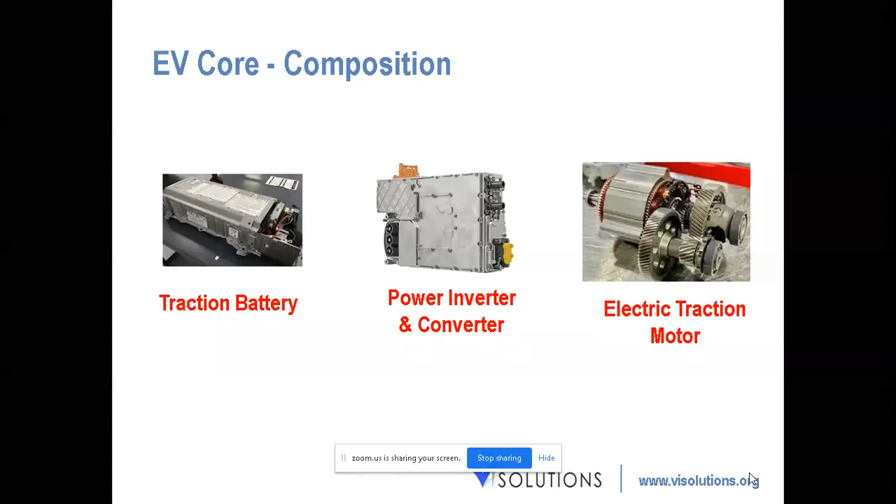Out of which we are going to focus on power inverter and converter, because as a part of this FDP, other people are going to focus on the other components, but I'll show the insights as well, surely. But how does NI's tools provide us with the solution? So that's NI's role in power electronics.

Basically this inverter is going to have a lot of power electronic components. How does it help? The power converter prototyping, how does it help in power converter prototyping, power converter monitoring and control, and electrical drive design and control. So these are the three key components where NI's tools, like LabVIEW and other tools, come in, which you're going to see.

So basically, this is our power converter prototyping. We have a power supply, let's say it could be an SMPS, or mostly in terms of electrical vehicle, it's going to be a battery, a traction battery pack. Then we might have a load at the end, and this load could be an AC motor, or a DC motor, or anything.

We cannot directly connect this battery to the load, so we'll be having power electronic switches, which could be used to convert the power from the battery to something a motor can withstand, whether DC or AC. Depending on that, we'll have a different type of power converter. So if it's a DC load, we'll be using a buck converter, or if it's an AC load, it's going to use an inverter, which converts DC to AC.

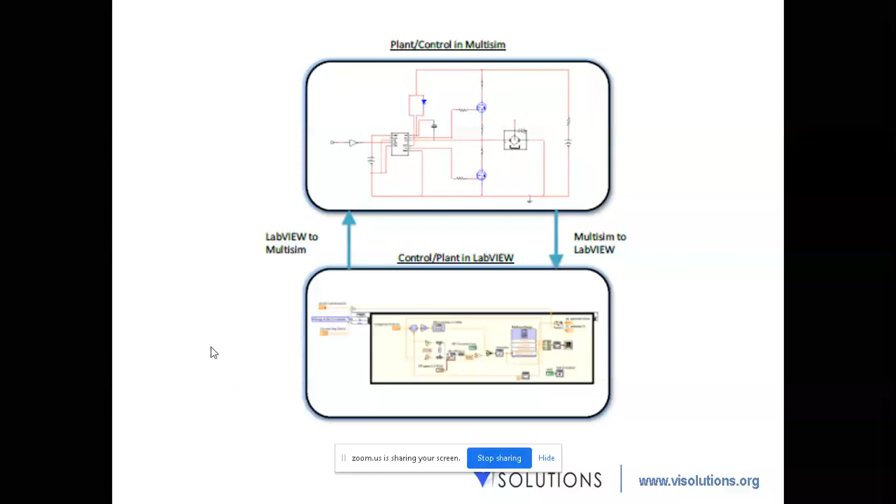So whatever they use during simulation, they will remove the simulation components and replace it with hardware. So the same signal, whatever was sent to software, will be sent to hardware. And as per my experience, not a lot of difference appeared between the simulation and the real world observation. When we used that, we were able to compare the simulated data with the real data, and so far, 99%, it was the same.

So this power converter prototyping will be done by using Multisim circuit design component. Then to control the aspects of it, we'll make use of LabVIEW.

Then in the future, when you're comfortable with it, instead of a Multisim model, you will use a controller, a real-time controller which is connected to the circuit, which has a digital pulses generator, an analog data acquisition device, and this will be connected to that hardware.

In real time it will send control signals to the power electronic switches, and it will also get back the current output as well, so that you can build a reliable closed loop controller.

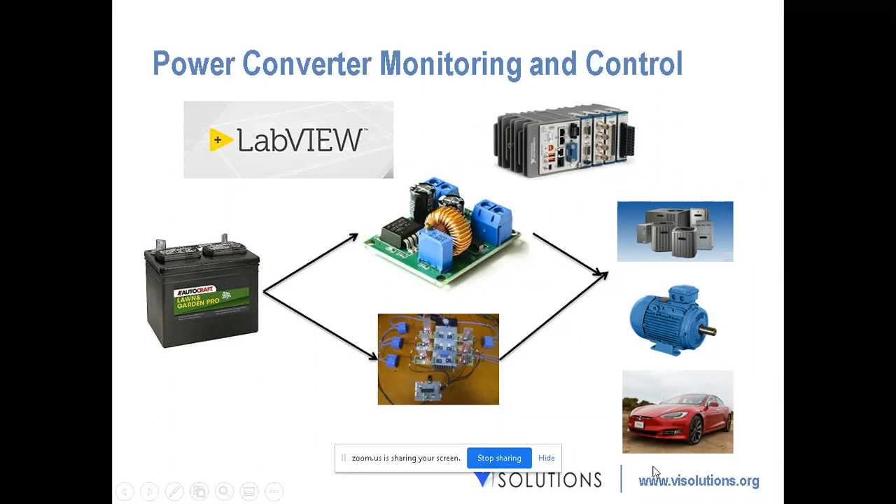That also will be programmed by using LabVIEW, and the load can vary. It could be used to charge the battery, it could be used to power an AC, an air conditioner, refrigerator, or motor, or possibly an electrical vehicle as well.

Out of which we are going to see several examples of how Multisim and LabVIEW work in tandem to achieve whatever you want to achieve.

So in order to give an example, I hope everyone knows, I'm sure everyone knows about what is a boost converter. So it's a circuit which is going to convert a low voltage high current supply to possibly a high voltage low current power supply. It boosts the voltage.

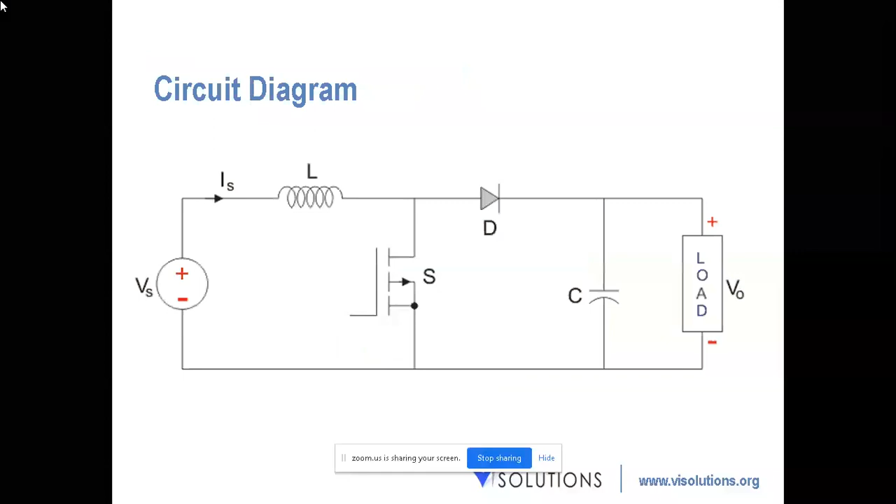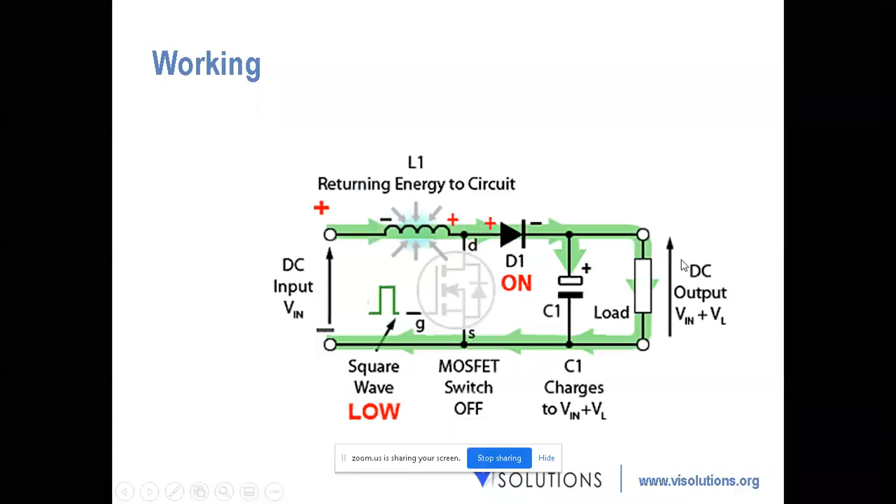It's working and all, I'm sure everyone knows that when the MOSFET is on, the inductor charges as much as possible. The amount of time taken for it to charge and discharge will contribute to the duty cycle. And when the MOSFET is switched off, this will discharge and it will have output voltage equal to the input voltage plus the charge, the power stored inside the magnetic coil. It again gets added back into it. So V in plus V L is going to be equal to V out.

But in order to understand this design, there'll be a lot of calculations involved. We're not going to go in depth into full calculations and all, because that is very rudimentary. We are going to see how LabVIEW is going to help, I mean, we are going to see how NI tools are going to help you with design and validation.

When we design a boost converter, we consider several aspects and specifications. First is the input voltage - how much input voltage can your power supply guarantee? It could be from a solar panel, a battery pack, or from the grid directly. And what output voltage do you want? Probably you have a 12-volt battery and you want to control a 48-volt motor. These things should be considered carefully, along with the maximum current drawn by the motor.

Then voltage ripple. Let's say you have an output voltage of 48 volts, but you have a MOSFET switching on and off so the inductor acts like a transformer, switching at very high frequencies. So in order to filter out those ripples, we need an appropriate capacitor. You cannot filter it out fully - that would require infinite capacitance, which is not possible. So there will always be a threshold requirement.

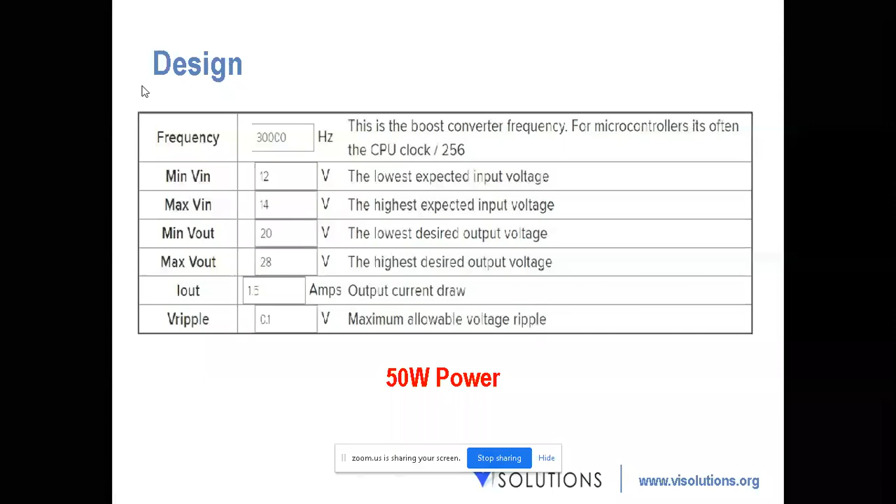So when I calculate it, I get values like inductor size as 38.88, minimum value. This is minimum, which means I can go significantly larger as well. I can give peak inductor current. Inductor current is going to decide the thickness of the inductor, so I cannot keep any thickness, because it's going to pass more current inside it.

And capacitor value. We are going to use a Schottky diode because Schottky diode has ultra high frequency capability to switch on and switch off. So it is going to have values like voltage and current.

So based on these values of voltage and current and other calculated values, we are able to fix a boost converter of something like this, which we are going to design right now in Multisim.

So, 38.88 microhenry, I'm just going to give 40 microhenry, and 500 microfarad. I'm going to give the next nearest value; it should not be max minimum, the next maximum value will be given, the next maximum standard value, that is 680 microfarad.

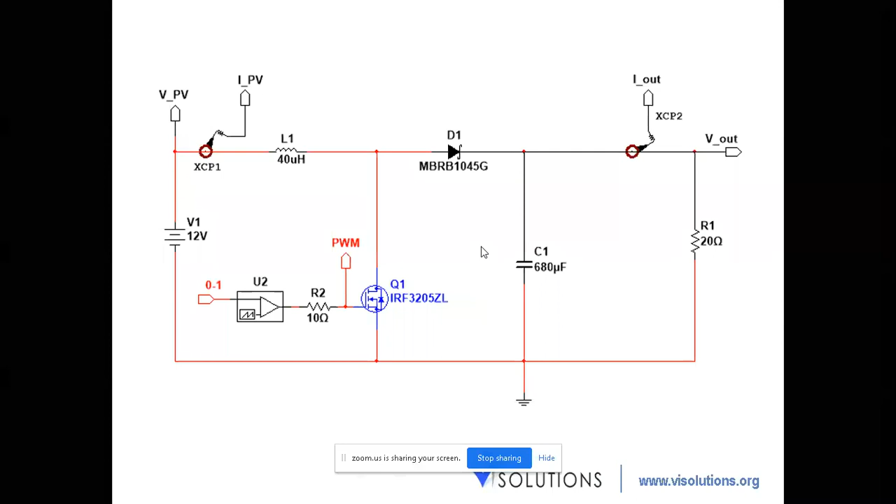Now, in order to design the schematic and evaluate its working, I'm going to make use of Multisim. Let's see how Multisim is going to look like. Basically Multisim, this is Multisim, we're just going to go for the implementation part.

This is the circuit which needs to be simulated, so we have the circuit schematic here. This is Multisim, the circuit design platform where we can pick and place different components, interconnect them as per our requirement. It also has a SPICE model for every component, meaning you can simulate it with respect to time, but we have to know the basic rudimentary operations.

That is first placing the components. Multisim is very rich in component placement, meaning it's going to have most of the components that are required for us. If you want more components, probably a different package of Multisim will be available, but we are not going to go deep into that. So in order to place components, right clicking on it and selecting place components is going to do the deal.

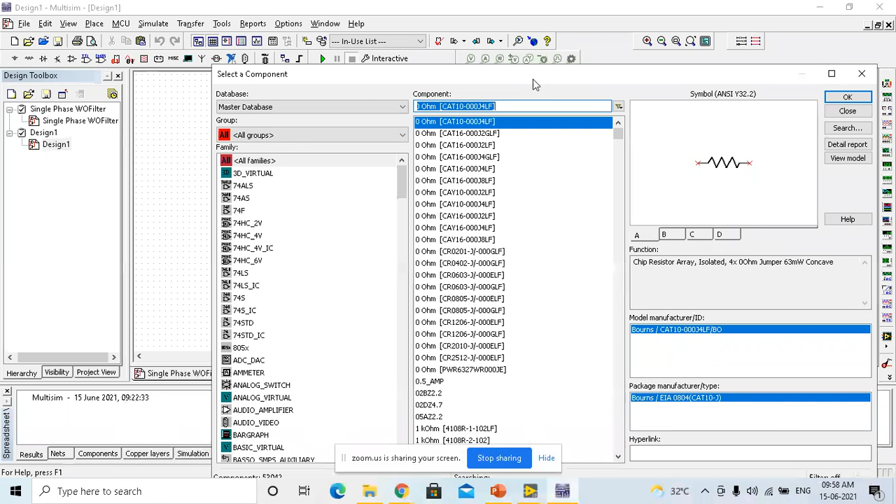And if you see, this Multisim has like 53,000 components, 54,000 actually to be frank. And if you want to filter out depending on the type of component which you use, let's say 3 types of components are going to be there if you take any circuit. It's going to have a power supply, it's going to have active or passive components, and at the last you'll be having measuring components. The measuring components are used to extract information from the circuit.

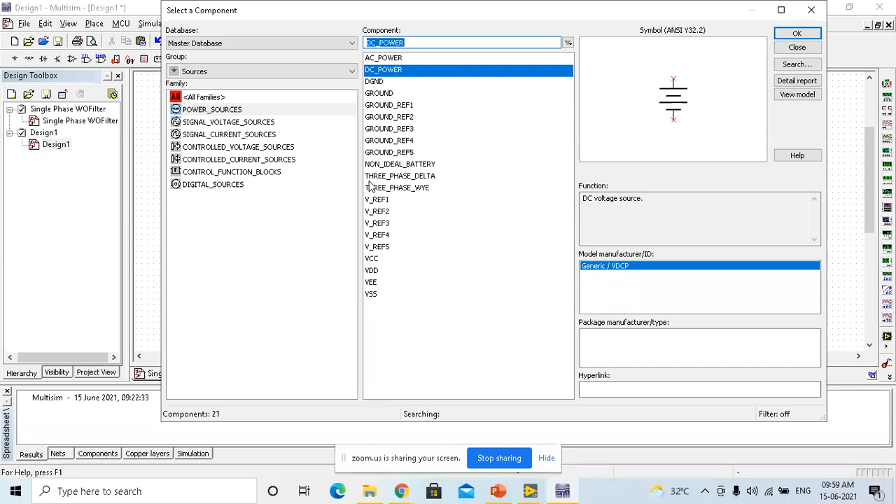So first is going to be the sources. And in sources we have power sources, and in power sources we have DC power, which we pick and place here. By default, it is going to have 12 volts. If you want to change it, you can change it, but let's place all the components first.

So next is going to be this 40 microhenry inductor, which we are also going to find here by going to group. I'm going to try to filter it out, find the basic component, and in basic components I have different types, out of which I'm going to find the inductor. An inductor can have any value; different types of standard values will be given here. But let's say I don't find my value, I just type it as 40U, and it's going to give me the recommendation.

And I can also select the type of component type. This does not have any significance in simulation, it's just to have it as a reference. So, 40 microhenry, I can pick and place.

Let's say we don't know what type of component only it is. I can always go to all groups, and if I don't know the component name, I can simply type it here. Let's say I don't know where to find this Schottky diode. Schottky diode normally comes under diodes.

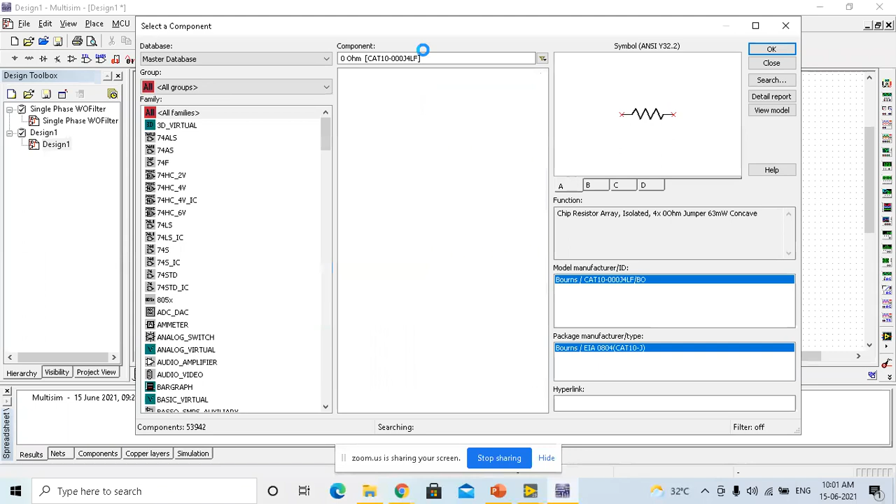Even if you don't know, you can always go to all groups and type the code. In this case, the code is MBRB1045G. There are different types of Schottky diodes. This one is a 10 ampere, 45 volt Schottky rectifier.

And Multisim also, obviously, since it's dealing with power electronics, we have transistors available. We have to select an IRF3205, which is nothing but a power MOSFET with 110 ampere pulsed current withstanding capability and 50 volts constant voltage. You can view the model here.

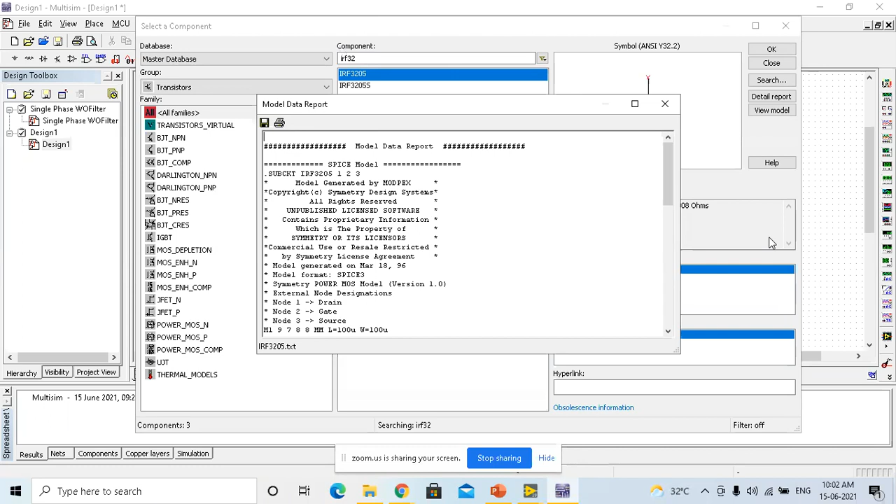Basically every circuit, in order for it to be simulated in the computer, is going to have something called a SPICE model - an equation that defines the characteristics for circuit simulation. So we're just going to select this IRF3205, and I'm going to place it here.

Next one is going to be capacitor. Capacitor, you cannot just type here as 10 microfarad or nothing, it's not going to work. If you go to all groups and type 10 microfarad, it won't know for which you are trying to say. So for generic components like a resistor, capacitor, inductor, you have to go to the basic components and find the capacitor or whatever it is, which will be available in basic, and here you have to type the value.

Here is going to be 680 micro. So at last you're going to have a load. Right now, to test the circuit, we're just going to have a resistive load. I'm going to find resistor here. I'm just going to take an arbitrary 20 ohm resistor and have it here.

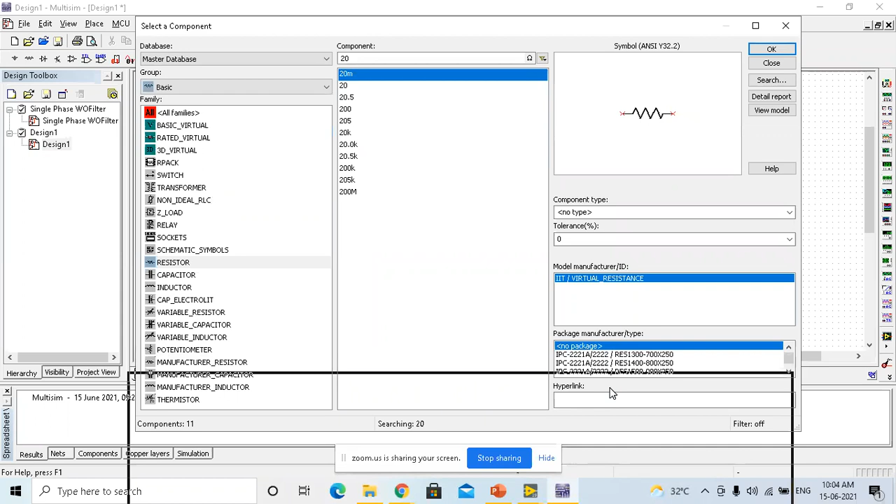At last, the circuit components required is completed. But anytime we try to do a simulation, since it's a calculation which is taking place at the back, any calculation requires something called a reference. So we need to go to sources at last, and in sources, power sources, we need to have a ground. It doesn't matter what type of ground you're going to use, but it's best if you use a normal ground, and this normal ground is going to act as a reference to your circuit.

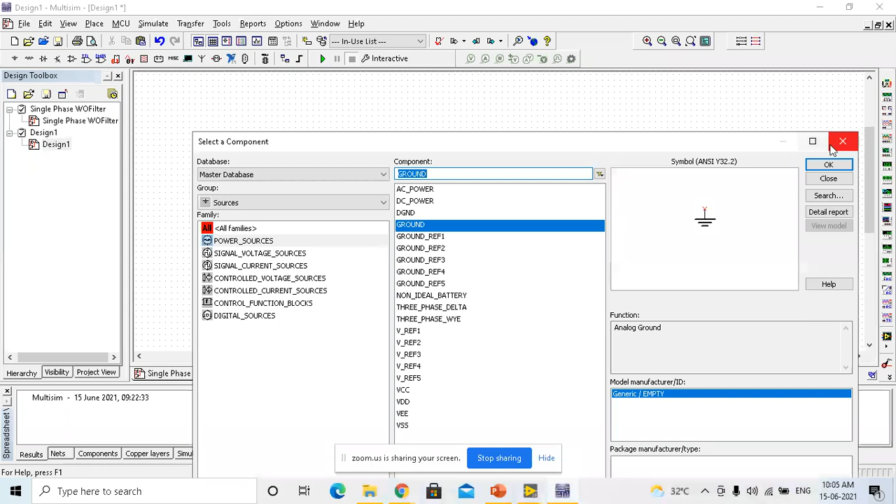So now we can interconnect these components just by clicking on the between the two terminals.

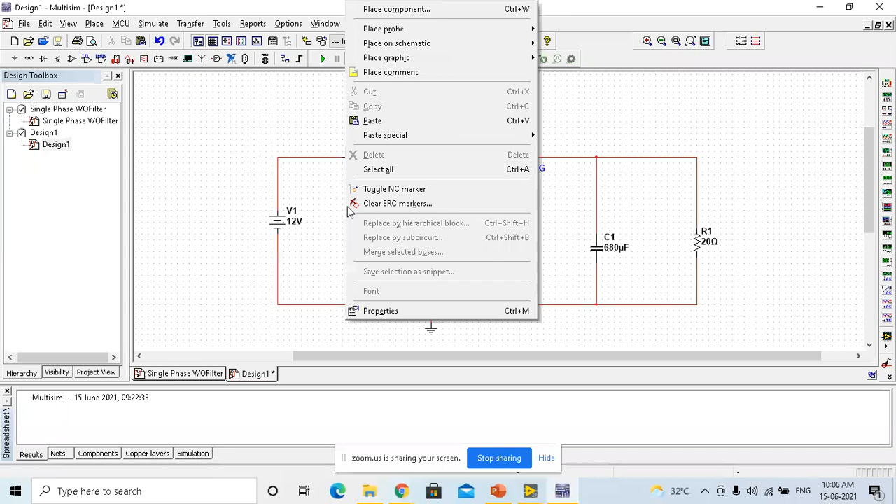Now, how do you generate the sine wave? I mean, the duty cycle. Duty cycle generator is not really hard, we have a separate component for it which can be used.

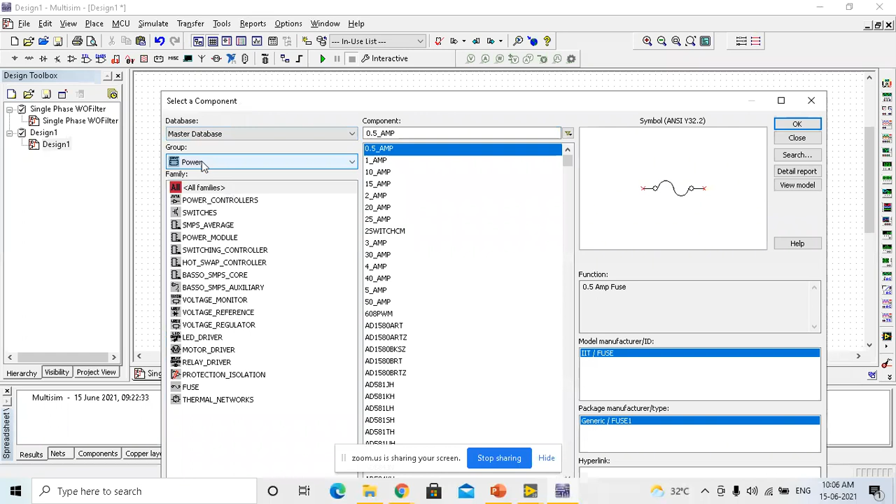So you can find that component, and I believe in power, we have something called power controllers. These power controllers have power converters required for different types of power electronic switches. It could be for AC to DC converter as well as DC to AC converter as well.

Let's say you're trying to make an AC to DC rectifier, so you have the phase angle controller as well, SCR, triac conversion - those things are also here. And if you want to do an inverter for three phase, you have three phase generator as well, SPWM generator is also available. So right now I'm just going to go for PWM, and I'm going to place it here.

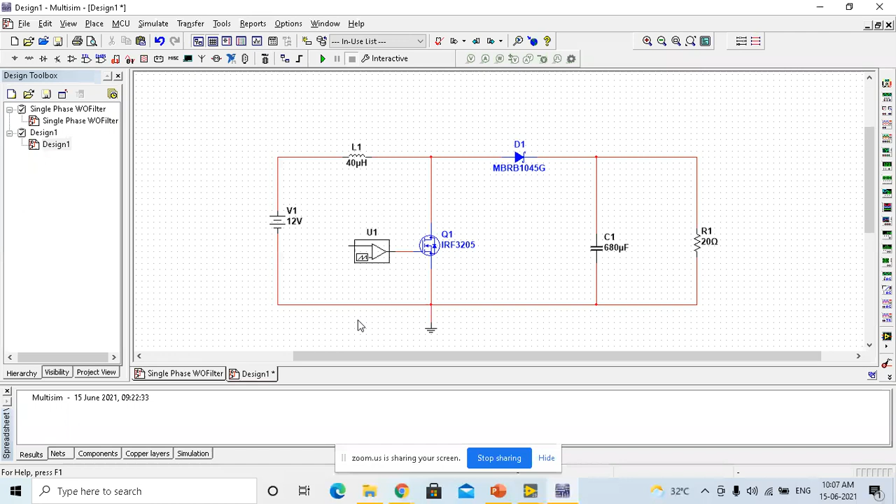I hope that was clear as of now.

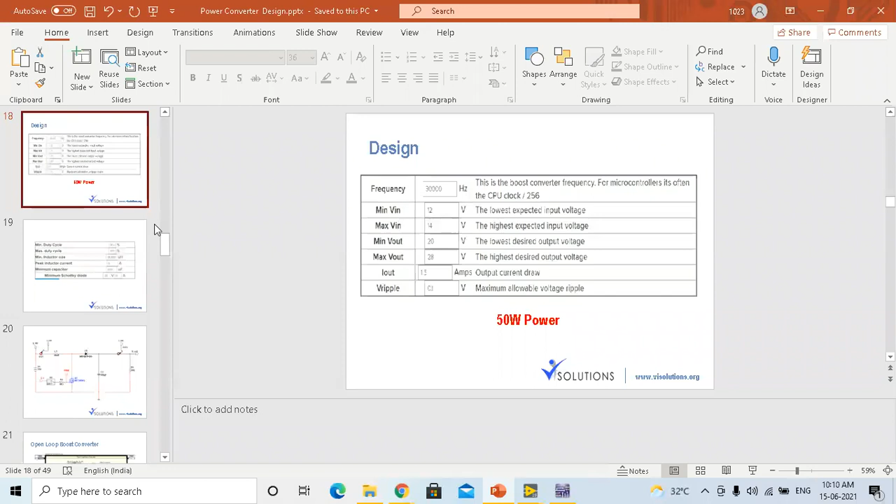As per our calculation, as you can see, all these components have been designed keeping in mind 30,000 hertz frequency, kilohertz frequency. So here also we'll give the 30 kilohertz frequency.

In order to fix the duty cycle, we need to have a reference signal generator, to give 0 to 100%. We need to give a value here, which will be considered as 0 to 100%.

Meaning, if I give 0 volts, it should generate 0% duty cycle. If I give 1 volt, it should give 100% duty cycle. Anything in between given, correspondingly, it will give the duty cycle. Let's say if I give 0.68 volts, that should be taken as 68% duty cycle. So it's scaling between 0 to 1 voltage to duty cycle.

The output amplitude of this PWM is basically going to be the turn-on voltage for the MOSFET. Most probably the MOSFET will have input characteristics and transfer characteristics. Basically, most power MOSFETs will switch on above 10 volts, plus or minus 10 volts for switch-on voltage. So I'll just give slightly more than that.

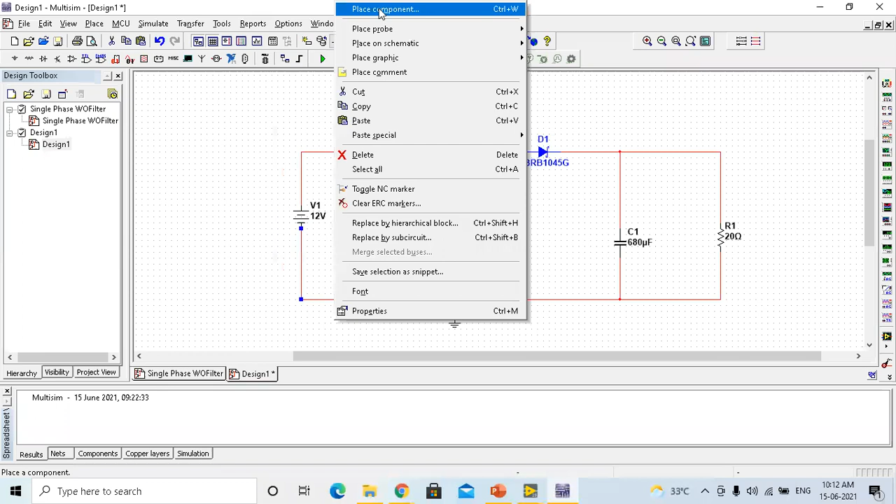So as we spoke, giving 0 to 1 volts here will vary the duty cycle from 0 to 100%. So I just need to have a variable voltage supply, change the values, then I'll be able to observe. To do that, I can right click, go to place component.

I'll go to all sources, signal voltage sources, and it's going to be like a DC interactive voltage source. Signal voltage, so DC interactive voltage source is going to be there. I'm going to click OK.

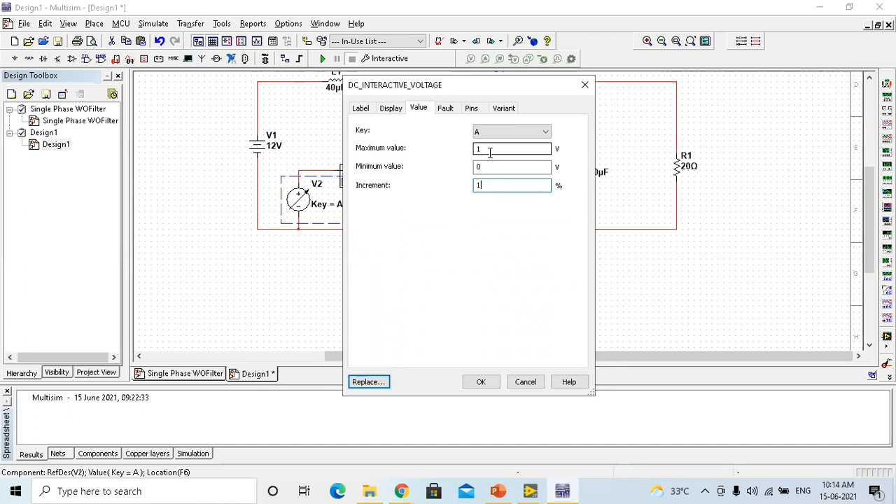If I double click on the V2, interactive voltage source, I can set what is the maximum value settable and minimum value settable. This is basically to convert the voltage to duty cycle. This can accept only from 0 to 1 volts, and this also should be set only to 0 to 1 volts. To give more steps, I'll have the increment value as 1%, so I can vary every 1%, from 1% to 100% of this 0 to 1 voltage. So every movement will be every 1%.

Now I can run this program, I can run this simulation. It's going to run. But the problem now is we will not be able to see any observation. I'm not saying it's impossible to view the observation in Multisim - LabVIEW is more suited for it, but it is surely possible to see the observation in Multisim as well.

For that, we have certain probes available in Multisim. There's something called a voltage probe, which I can use to observe the voltage. I'm first observing the input. I can also observe the current through this place at the input. So if you see, it's showing as 12 volts, and apparently 581 milliamps is being consumed.

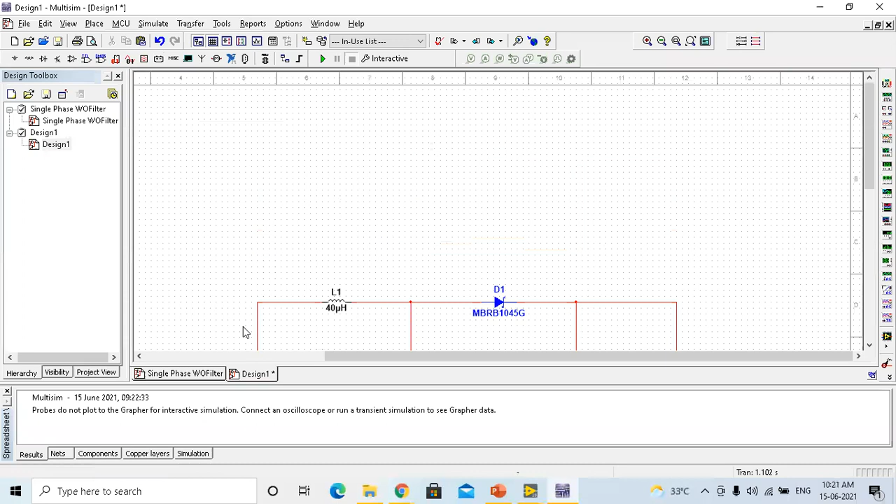LabVIEW co-simulation is there, voltage input terminal. There are two types of communication that can happen: one is from Multisim to LabVIEW you can send data, or from LabVIEW to Multisim you can receive data. So you have to use appropriate terminals. If you want to receive from LabVIEW to Multisim, let's say if I want to get the duty cycle value, that command is got from LabVIEW to Multisim. So we'll use voltage input terminal.

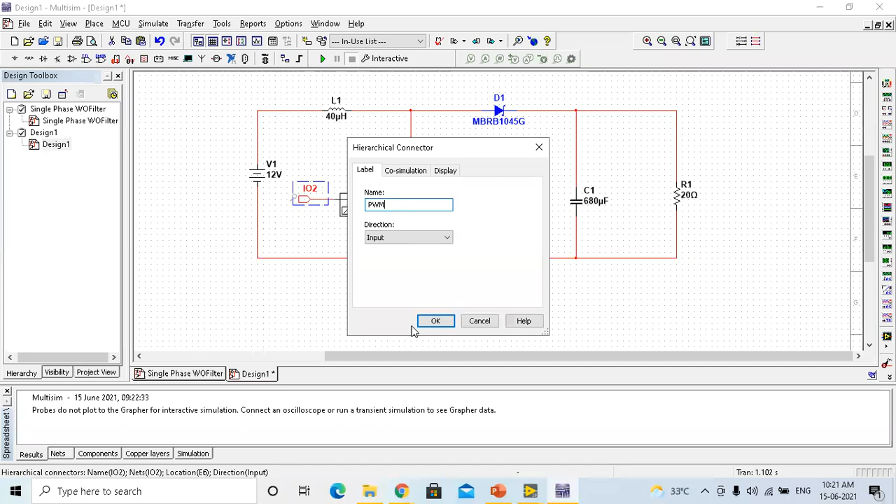We can double click on this terminal and change the name of the terminal as well. Let's say this is PWM, we can set it as PWM. Let's say I want to observe the input voltage and output voltage, so then I'll place something called voltage output terminal.

You can rotate the components by pressing Ctrl and R together. And I can observe the input voltage. I'll double click on it and make it V in. I'll place another component.

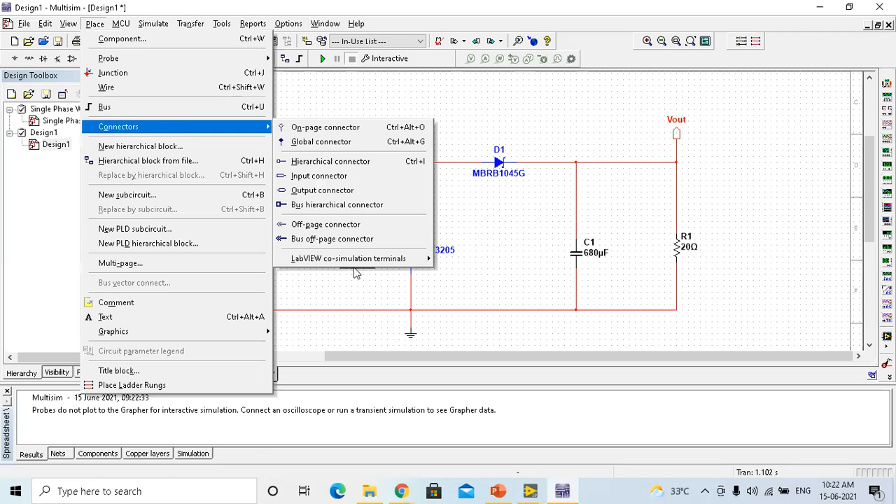Now current is a tricky object, because if you see, we have a current input terminal, of course, but right now we don't have a current output terminal. So typically this can be handled by using something called a current clamp. The current clamp will basically convert the current to a current equivalent of voltage.

Current clamp multimeter is available, no? So the same thing. This current clamp is going to have a ratio of voltage to current out properties. So I just want both the values to be in the same proportion. Right now by default it's going to be for 1 millivolt, it's going to generate 1 volt per 1 milliampere change. I'm going to change it to 1 millivolt per 1 ampere, that is 1 volt to 1 ampere basically if you cut mA and mV.

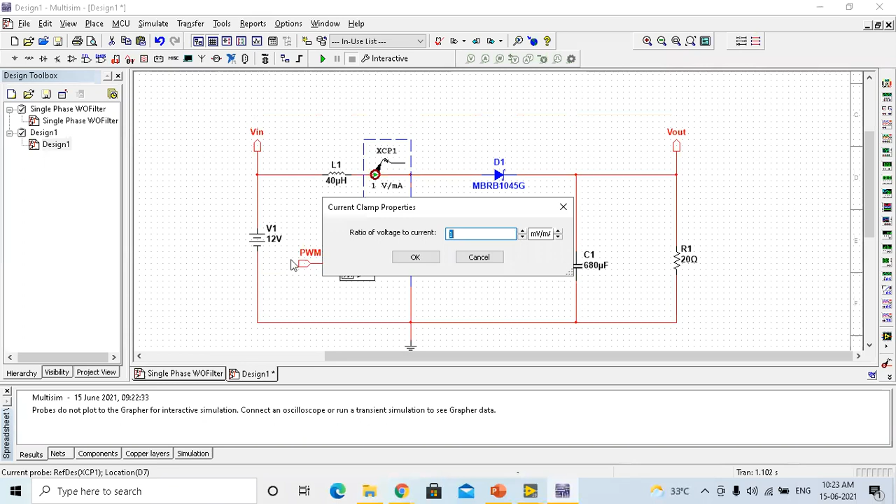So I'll have one more output as well. This is for input current and this is for output current. Now current has been converted to equivalent voltage, so I'll again use the voltage output terminal to transfer this data.

Okay, this is V out, sorry, I out. I mean V I in.

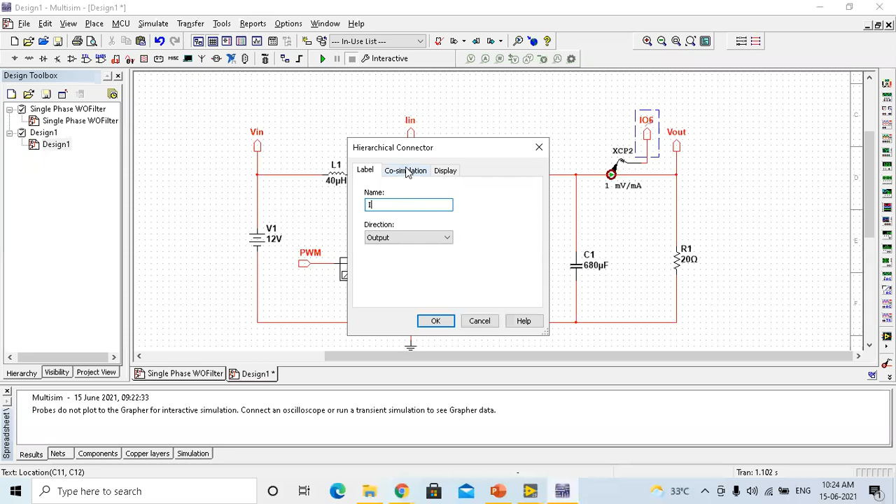Okay, I'll save this as boost, and be done with it.

Okay, now we can close this off and see what exactly this LabVIEW is going to do. Now that our circuit has been designed, next is to create a converter for this circuit.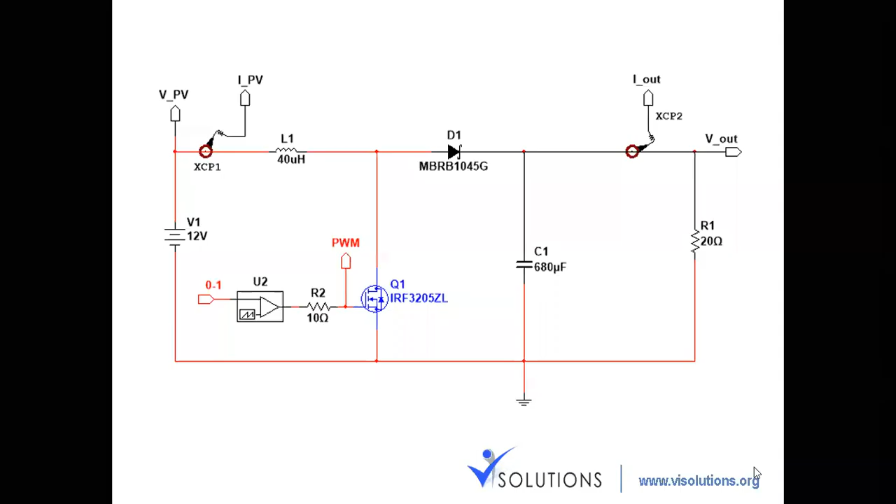So for that we'll go for LabVIEW. How is LabVIEW going to help you? LabVIEW is basically, I mean, a graphical programming platform where you can use zero code. It's a tool which is mostly important for Industry 4.0, where Industry 4.0 acts as the place that introduces the concept called zero code, no programming concepts for automation.

So that's one of the aspects they introduced. LabVIEW is a very important tool for that, and here zero coding is required. One thing is you have to drag and drop different functionalities together and connect them to work with each other.

So here, if you see, this is the code in order to interface LabVIEW and Multisim together. Basically we have this boost converter model brought inside. We send the command of PWM to it, and we receive responses like voltage, current, and other things, which we can plot as well.

So since it comes under simulation, LabVIEW has different types of objects. We'll have two windows basically: one is called the front panel, and the other one is called the block diagram. The front panel is a place where you'll have the GUI, where you can create inputs and outputs.

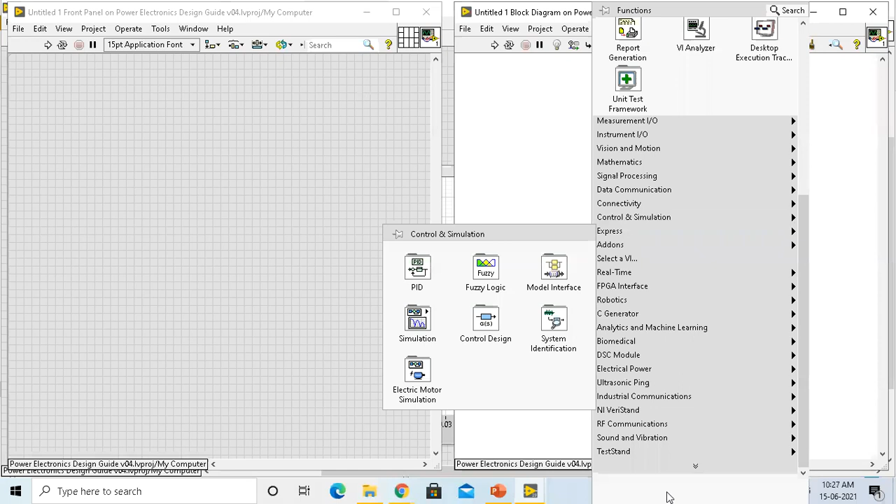LabVIEW also has several toolkits used in different domains. If you want to do signal processing, you have the signal processing toolkit. If you want to create software-based control systems, you have the control system toolkit. If you want to do machine learning, you have machine learning, if you want to do deep learning, you have a separate deep learning toolkit. If you want to create SCADA, you have the supervisory and data logging toolkit, electrical power, industrial communications, RF, and so on.

So now coming back to our design, all we have to do is simulation. For that, we have to go for control and simulation, and we have something called simulation, and a control and simulation loop. So this is how we can simulate.

We can bring the Multisim model inside LabVIEW. The Multisim model is basically, in the front end, just pictures interconnected together, but at the back end it's basically a SPICE model. SPICE model is basically, you can say, it solves ordinary differential equations, which makes it easy for us to simulate, running at the back.

And in order to give us the output, in order to create the responses, these equations will be solved and the responses will be obtained for us. That's what this control and simulation loop does. If you configure it, you'll have an ODE solver where we can give the initial and final time. Basically it's going to do the integration, and we can control other aspects as well.

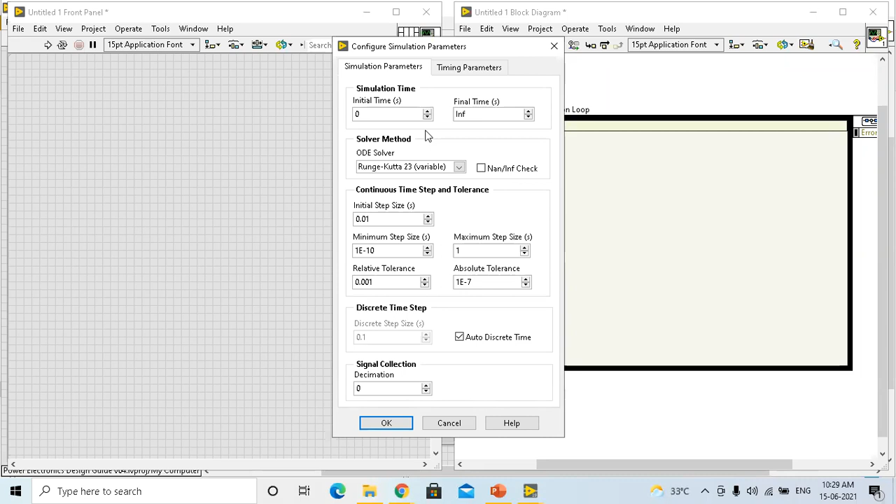The next step is to bring the Multisim model inside, which I can bring from here: Control, Simulation, External Models.

External models are basically available outside. You can build your own model if you know, let's say, the transfer function of a boost converter or a buck converter, and bring it in here to build it internally. But let's say you're going to extract an external model from external software, you have other options as well, like Multisim.

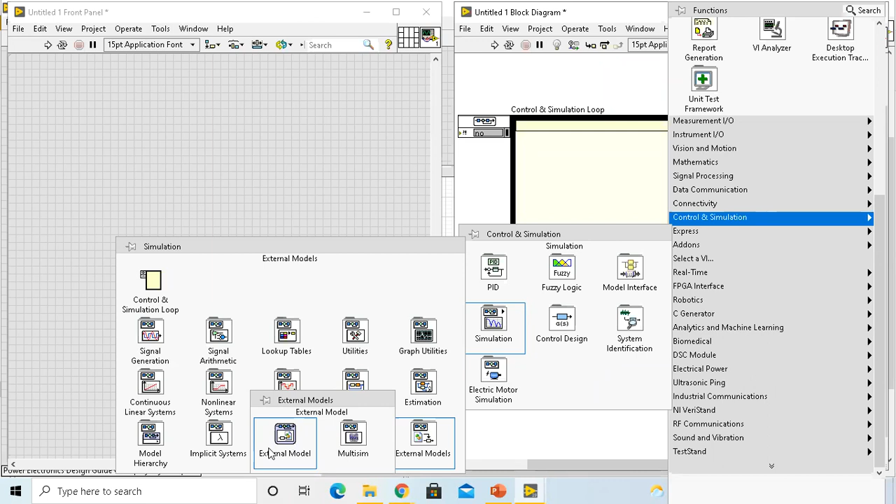Or let's say you have a MATLAB model. Most MATLAB models can be converted into a DLL, so for that you have the external model option as well, and you have a model interface toolkit which can help you get the Simulink model as well. So there are ample opportunities.

So I'm just going to take the Multisim model and place it. After I place my Multisim design, it's going to ask me for the location where the Multisim file is stored. I'll browse, go to desktop, select boost converter, and give OK.

Here, basically, I need to give the PWM input, and I will be able to observe the output required for me.

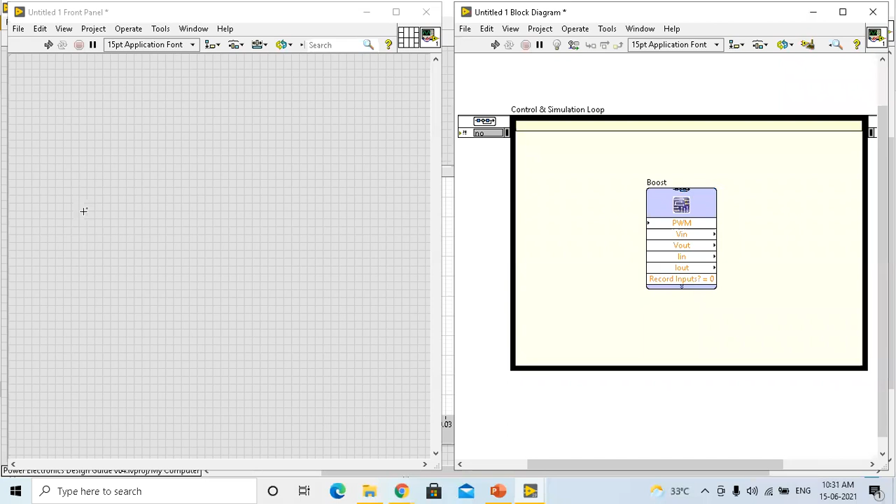Now, LabVIEW is very easy to use for giving inputs, unlike Multisim where we have to give a power supply value directly. In LabVIEW, to give inputs, we just right click on the front panel, and you'll have different types of data types like any programming tool. You'll have numeric, because PWM is a numeric value.

There are many ways to give the PWM input, out of which I'll use a knob. By changing the knob, I'll be able to change the PWM.

PWM will vary from 0 to 1. The minimum value is already 0. For the maximum value, I'll change it to 1 by double clicking on it and editing it.

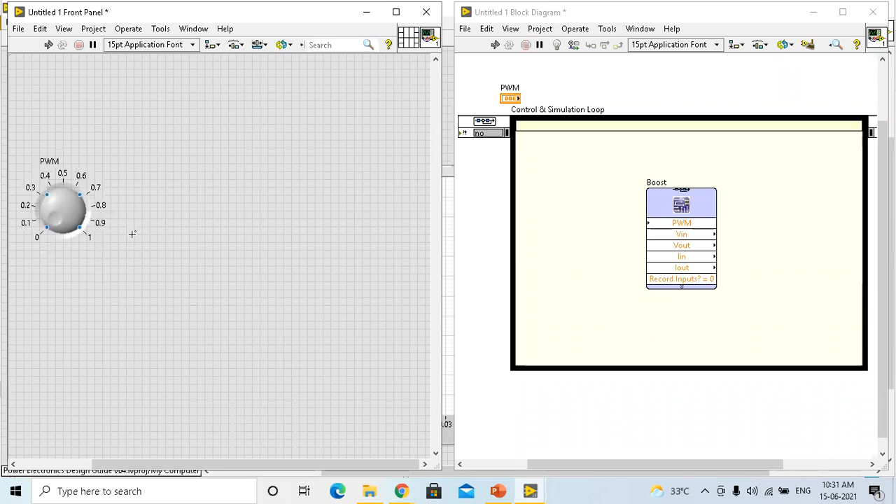So this PWM knob is connected to the PWM input of the boost converter. To view the output, there are many ways to do it, but the most significant way is there is a plotter available.

I'll right click on the LabVIEW window, go to Control, Simulation, Graph Utilities. This is available in the simulation and can help us plot the values of voltage output, input voltage, input current, and everything.

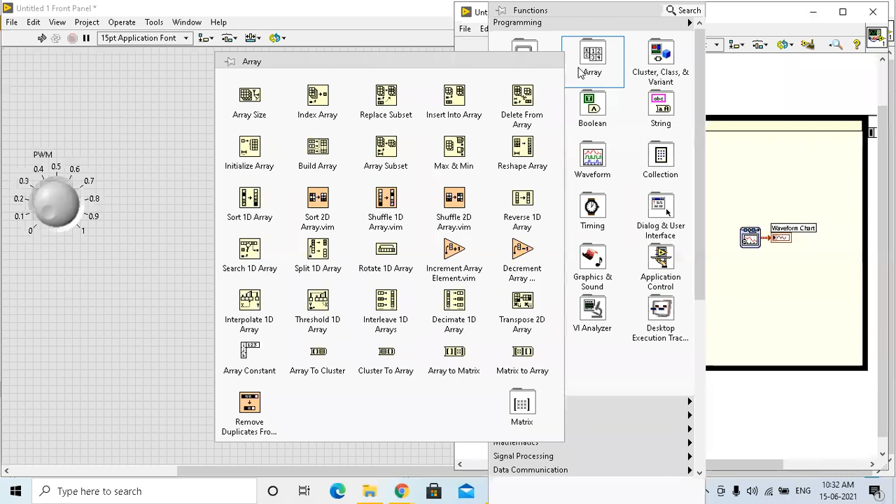Now I want to send multiple values at once, so I'll just convert everything to an array. First I'll send the voltage input, then the current input, next voltage output, current output.

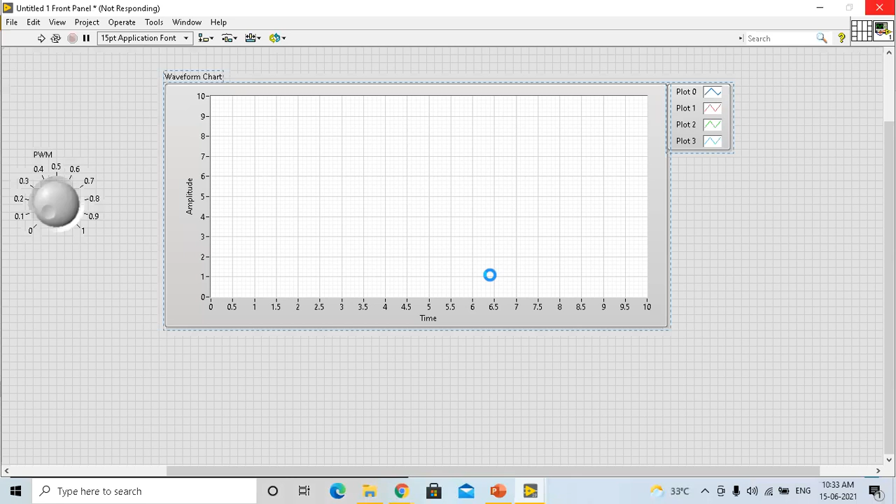Another important reason why people go for LabVIEW is you can configure the appearance of your program in many ways. You can tweak your program and model your GUI as per your wish, and change it however you like.

So I'll just run this program for now. So I just pressed it. Like in Multisim simulation, your LabVIEW program can also be run by clicking this run button.

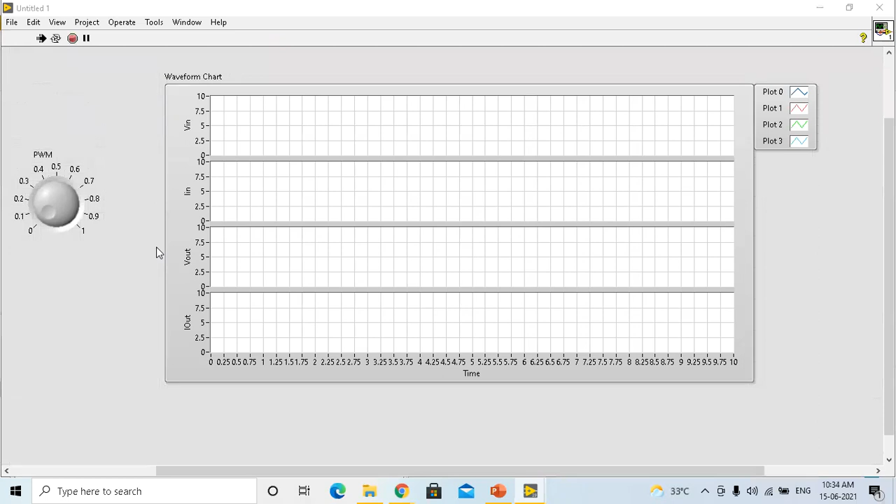When I click this run button, the simulation will take place. LabVIEW will give the data to it, and Multisim will respond to it. Right now we are getting data, but the scale, if you see, is from 0 to 10, and right now it's working very slow, every millisecond or so.

So in order to see this data, we have to auto scale, and this is what the data which we get. To stop the program, we have this abort button.

Apart from this, I will also display the digital display of this so that I can see the mathematical value as well. Here I can see graphically what value I'm getting, but to see the approximate value I always have to use a value box like this, which will show me the numeric value.

Apart from that, I can also control the rate at which this simulation will work - that is this discrete step time. So I can make it work, each step, every 1 millisecond, microsecond or so. At least the time base will be calculated as such.

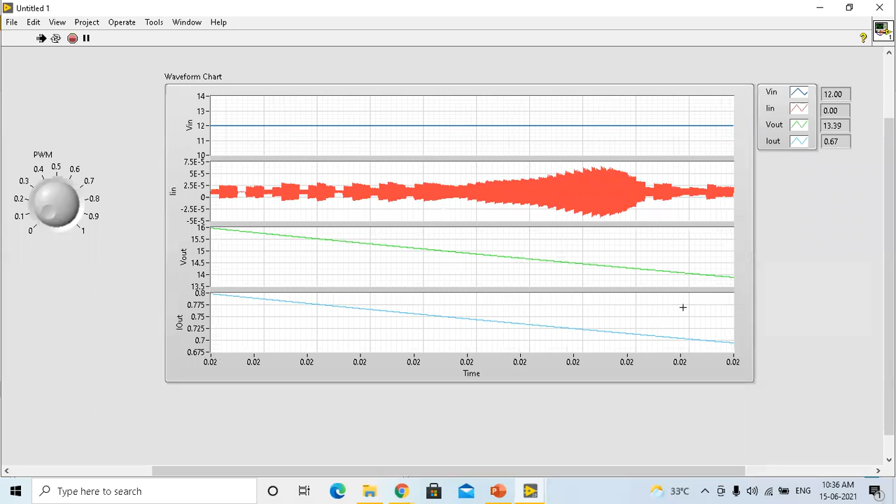Initially you can see this V out is overshooting, because any time at the start of a power supply when you give it, it's always going to have a transient due to the inrush current and stuff. So when it settles down, you will see its value - we haven't even given the PWM value yet. But after it settles down, if you change the PWM, you will be able to see the value change.

It has settled down. Right now your input voltage is 12 volts, output voltage is 11.62 volts. So let's say I vary the value - you can see the V out has changed.

So you can still change the PWM voltage, and by changing the PWM you can get more value out of it. So I get 0.75, which means I get like 4 times the input voltage.

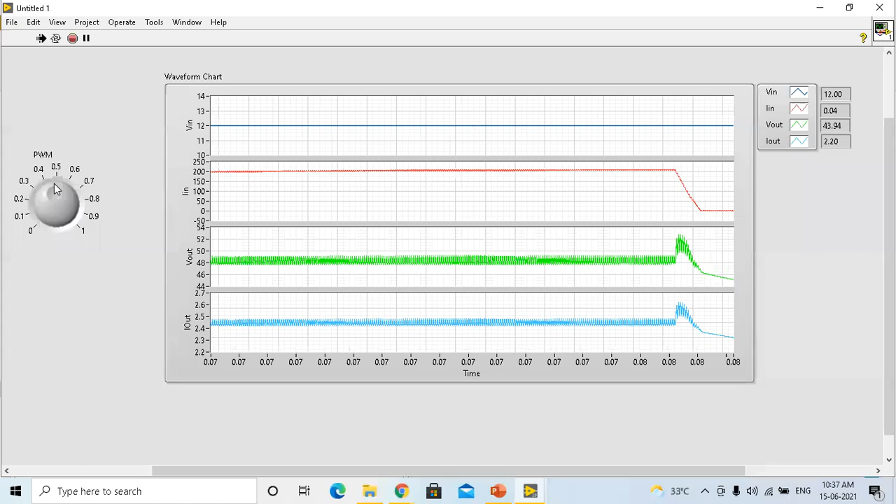Okay, so here we can see the input current, that is, the ripple current, the current ripple due to switch on and switch off.

So this is how you can test and validate your controller. This is open loop control, meaning I just give the PWM and the output is going to be the output voltage.

Similarly, you can basically create closed loop control. In case of closed loop control, you have to convert. Either you can have the set point as voltage, or in case of electrical vehicle, you can set the set point as speed, for which we'll see the examples as well.

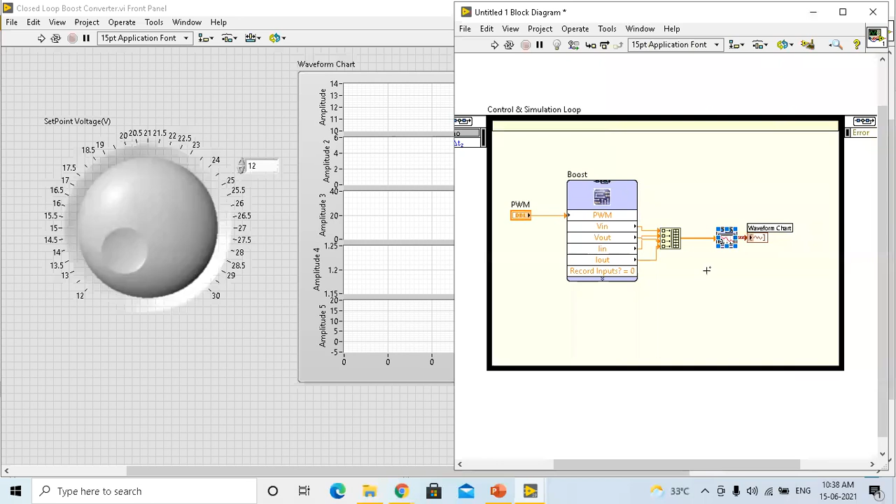Previously for open loop, our input was just PWM and output was V in, I in, V out, I out. For closed loop control, basically you'll get the set point voltage, and your output will automatically go and set at that voltage. Instead of giving the duty cycle, we will give the set point, and the duty cycle for that set point will be automatically calculated, and that voltage will be set.

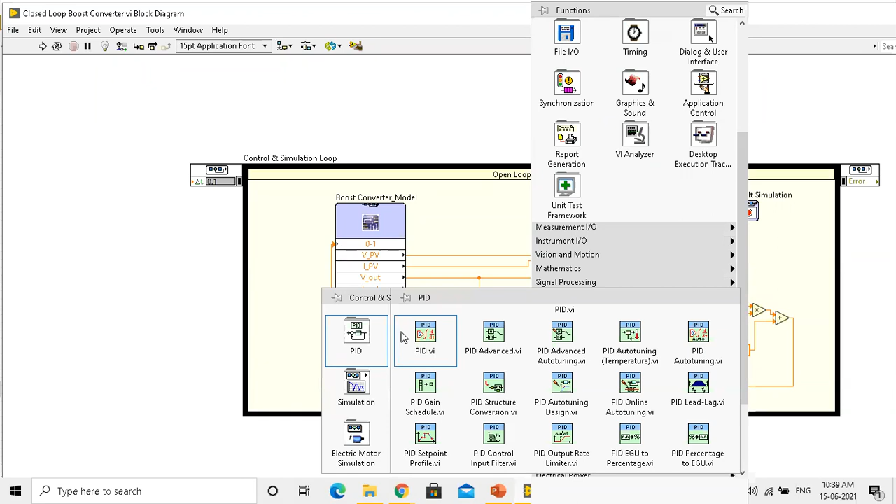Basically we'll use a PID controller for this in order for us to settle down quickly. So we'll take the PID loop, PID's component, which is available at control and simulation. We have PID functions available.

So basically we'll take the output, that is the response V out, and give it as the process variable. We'll give the set point where it has to go. Then we'll get the error, the output error. This output error will convert it into an equivalent value of the duty cycle, and we'll be able to create the closed loop as well.

Now, instead of the duty cycle, we can probably create a relationship between speed and duty cycle as well. But let's say right now we are seeing for set point of voltage.

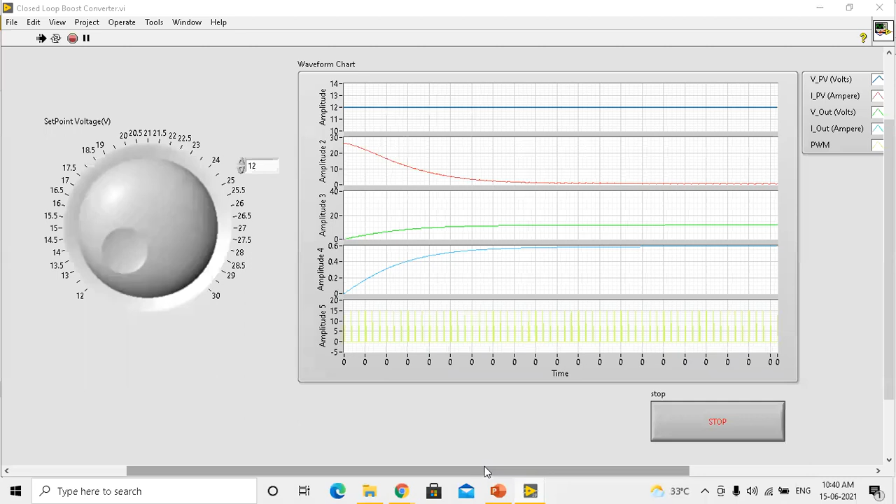Here we are giving 12 volts as set point. So V in is 12 volts, output also is 12 volts. Correspondingly the PWM is also iterated. Let's say if I want 24 volts, I'll type 24 volts here, and this PWM will make sure that it will go and settle at 24 volts.

Of course, overshoot and all will be there. If you can fine tune your PID, it's going to go and settle there as well. 36 volts, yes, sure.

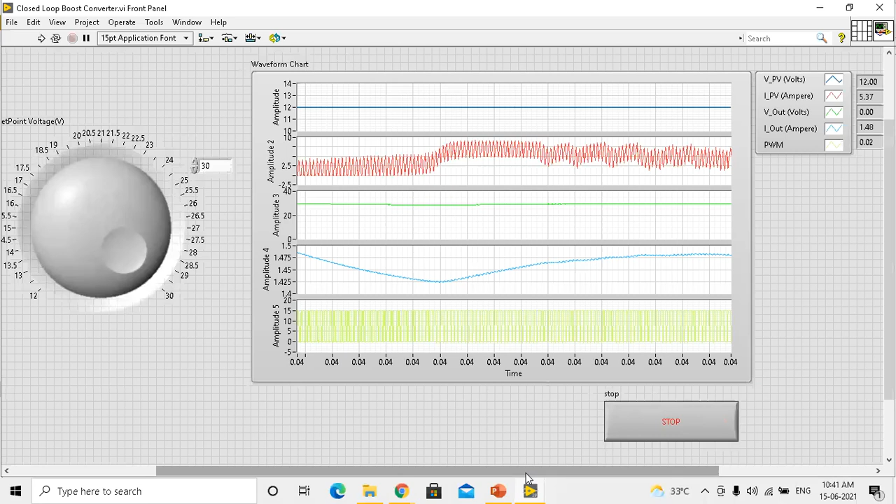So such things can be done by using the LabVIEW environment. There is a reason why we fixed boost converter. Number one, it's not going to take a lot of time. Number two, boost converter, buck converter, and DC to DC converter is also equally responsible in EV, right?

But of course, we can design a single phase inverter as well, or three phase inverter for that matter. So let's say, for example, if you see, we have a... one second, yeah, open Multisim design. For example, we have a square wave inverter.

For which we have a circuit like this, a single phase bridge rectifier and bridge inverter. We have components placed in this fashion, and we are also getting the output across here.

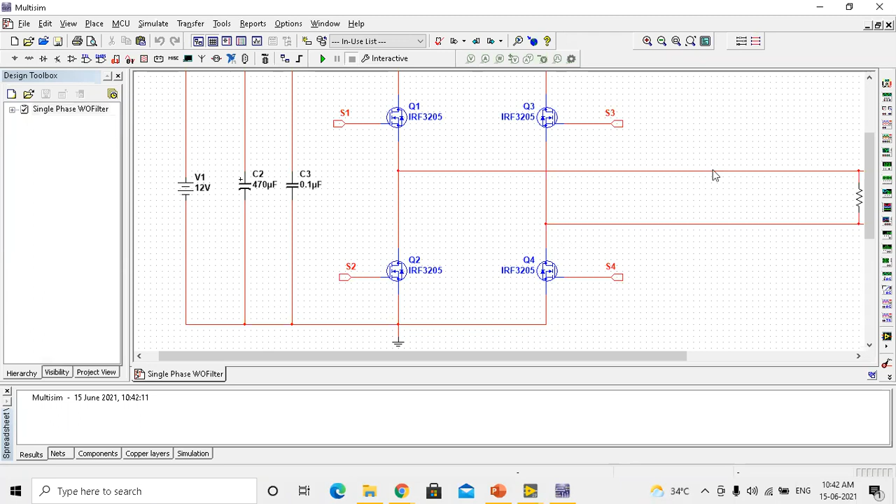So naturally, for inverter, we have to set the sequence of switching on and switching off. That cannot be done in Multisim. At least for the boost converter, we had a place to set the PWM. But in order to do this, totally we have to use LabVIEW only, and in LabVIEW we have options to design a logic of switch on and switch off.

Basically we'll have a reference voltage, reference switch, reference signal, square wave signal generated, and based on the reference sine wave signal, we'll be able to commutate which pair of switch should be switched on. When the square wave signal is positive, one pair of switch will be switched on. When it is off, the other pair of switch will be switched on. Something like that we can set.

So S1, S2, S3, S4, and we can make the measurement and we can bring the data to simulation.

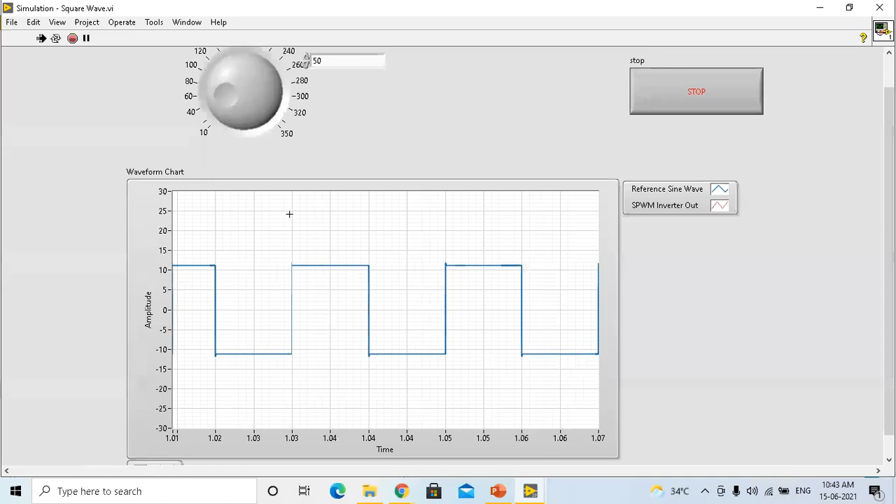Okay, so for example, square wave, if you see, we will get data like this. And in the same circuit, instead of square wave, let's say I want to design a modified square wave.

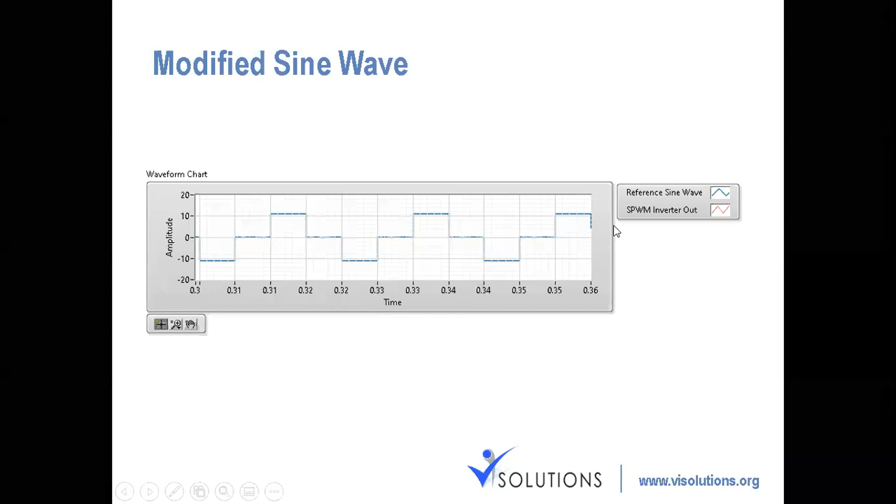In case of single phase inverter, we can change the control strategies. Control strategies basically won't change the circuit much. We can either convert it using square wave, or modified sine wave, which is basically halfway equivalent to a sine wave. So modified sine square wave will have multiple steps like this. For that we just need to tweak the logic.

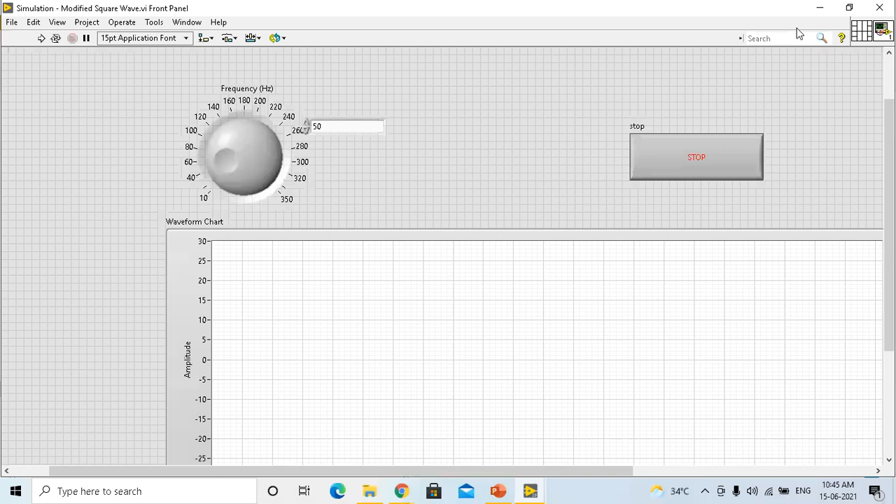And also we have a SPWM generator as well. We can vary the PWM's duty cycle sinusoidally, and we can commutate the positive and negative as well. So for that we have another logic, modified sine wave. Basically modified sine wave is addition of two square waves, which are 90 degrees out of phase. If you add two square waveforms of the same frequency, which is 90 degrees out of phase, you are going to get a modified square wave. So you're going to get a stepped sine wave like this.

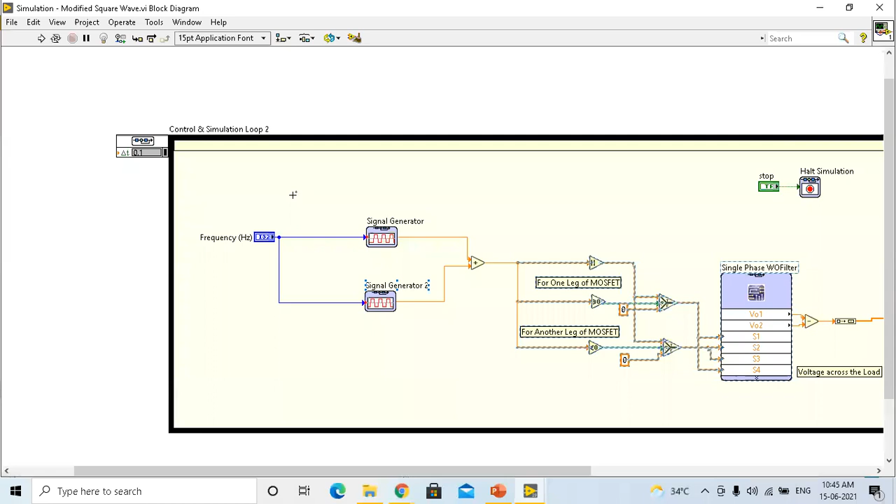So this commutation logic will be the same. Only thing is the reference signal generation will vary.

Let's say you want to generate SPWM based control. For SPWM based, basically you need to generate a sine wave reference. In the simulation we have a signal generator available, from where we generate this square wave signal also. After getting the sine wave signal, for SPWM, we all know how to generate PWM basically from scratch. We can compare the duty cycle value to a sawtooth waveform generator. By comparing it, you will be able to get the PWM value. So we are comparing this reference sine wave signal to the sawtooth, so that we'll get duty cycle proportional, PWM proportional to the sine wave.

And also we need to control the direction as well. This sine wave will have both positive and negative. So in order to commutate the inverter's positive SPWM and negative portion of it, again we need to control the direction by using this leg's MOSFETs. Further, this part will always be here.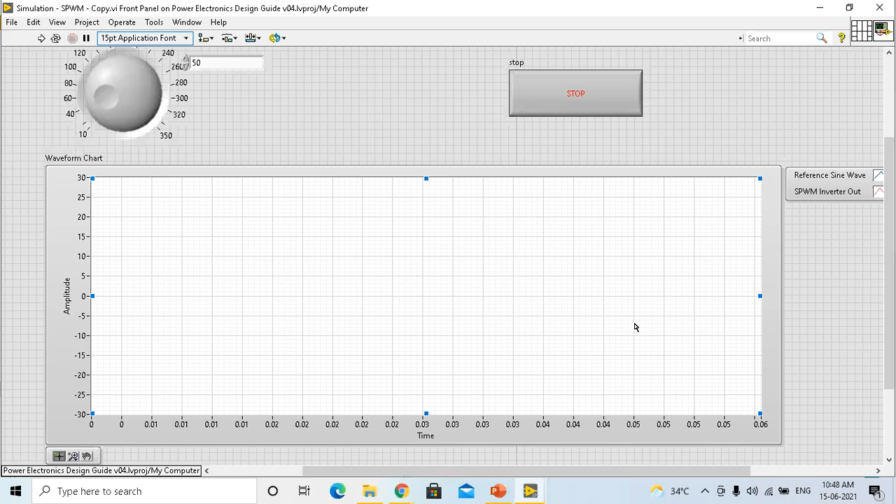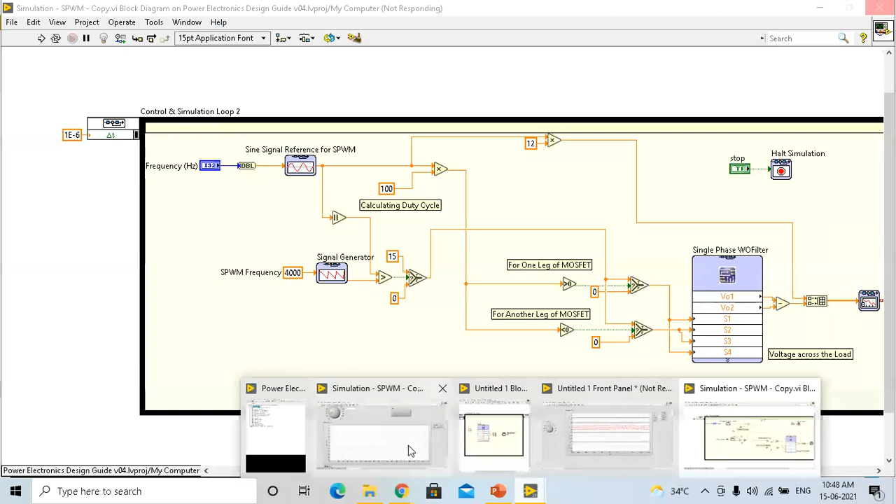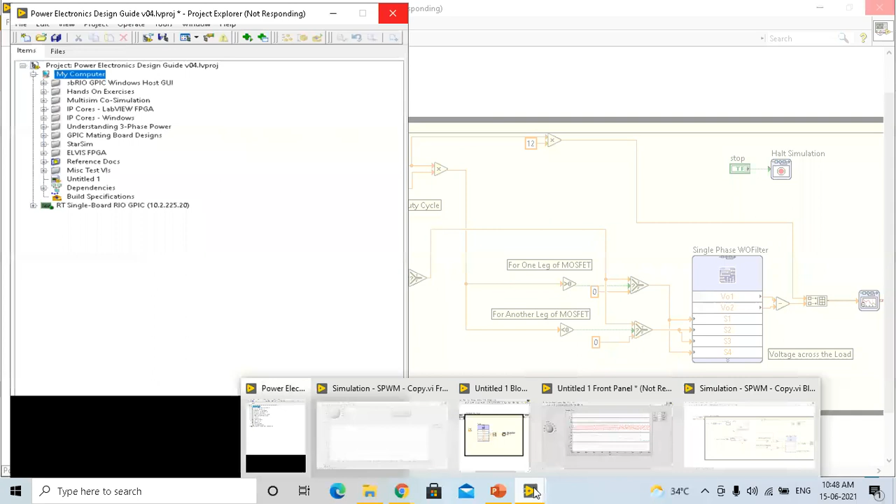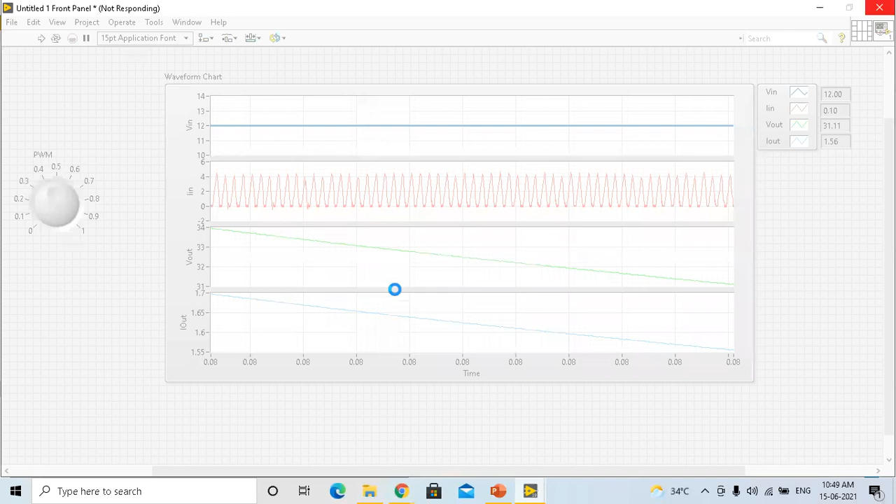Can we run this? Okay, probably it got stuck. Let's wait for a moment. Okay, I hope this started running. Yeah, it's running. You can see here.

As you can see, the reference voltage is behind, and this is the SPWM, proportional SPWM. So wherever the maximum voltage is there for the sine, you can see it will be very close to each other, that is the duty, so your pulse width will be very large, maximum. And when it is minimum, the pulse duty cycle will be very small, the on time will be smaller than the off time. And where it is higher, you can see the on time will be higher than the off time. It will be proportional to the amplitude. And this will happen at both negative as well as positive. Further, commutation will take care of it.

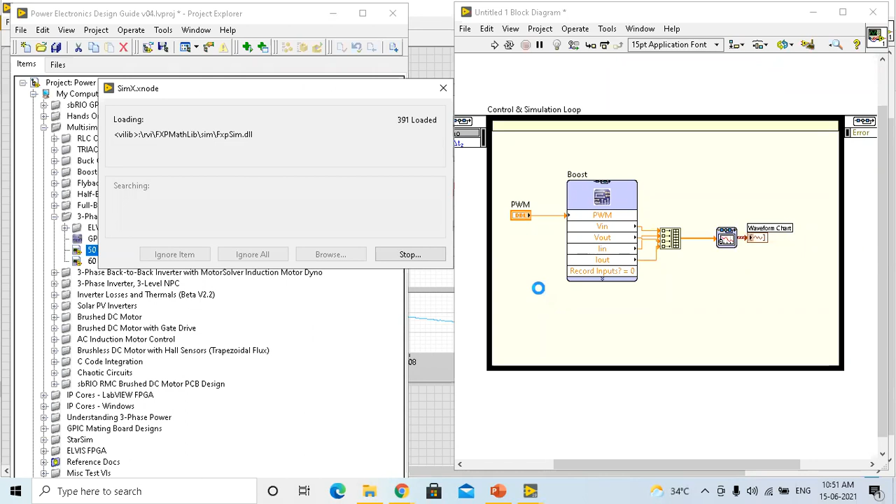And this is not only necessary for single phase. Probably you can do it for 3-phase as well. And of course that SPWM can be filtered out to a pure sine wave as well. For that, let's see an example here. Of course, it cannot be a very small circuit like this - probably a lot of optimization would have been done. Let's try to see one example here.

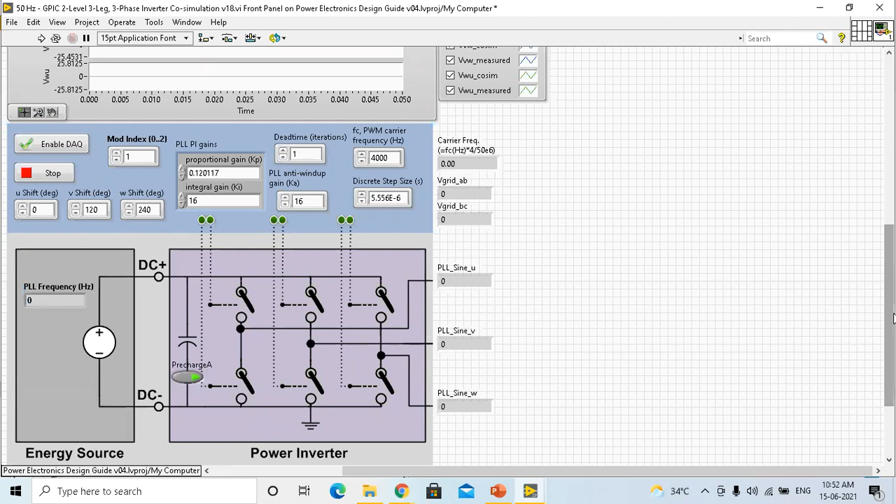Okay, so this is one of the examples. In order to keep the frequency constant, since we have filters in place, we need to measure it, and for that we'll have a PID to control the frequency. So PLL frequency will be employed. This is for a three-phase inverter circuit, and here we are going to use all three phases. So let's see how it works.

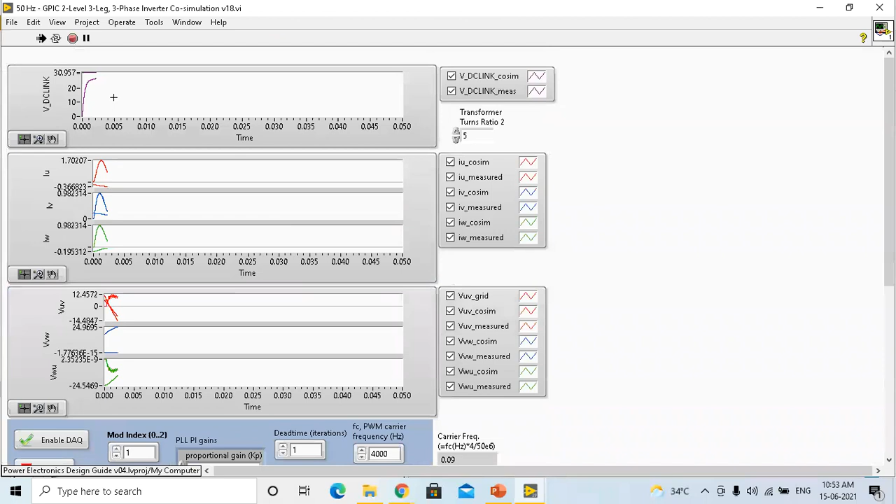And obviously we have not only the simulated value, we also have the measured value in line, meaning this circuit has been implemented and that data has been grabbed, so you can compare how it changes. So this is DC link measured value and DC link co-simulated value. Both of them will be almost similar. And this is voltage grid, voltage co-simulation, voltage measured, for all three phases. This is measured, this is co-simulation, it's almost the same, right? And this is for the other phase, and this is for the next phase.

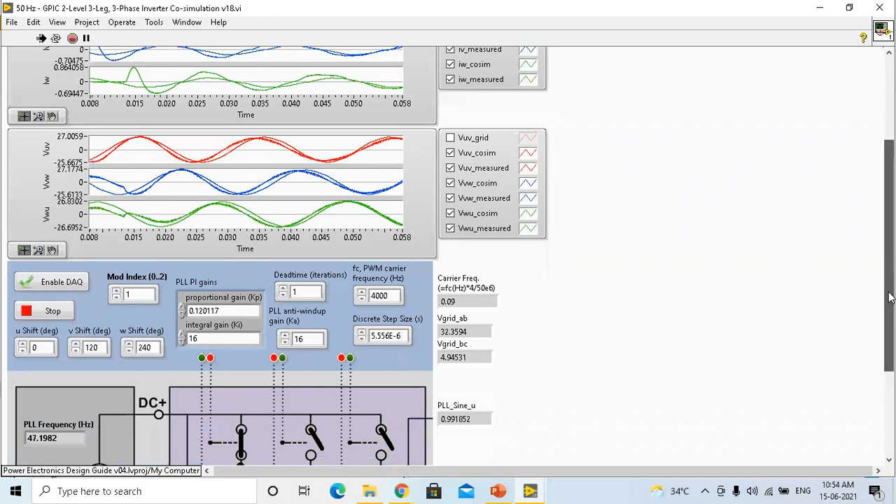See, so instead of... let me stop this. And the next objective is not only to control a normal inverter, but probably we should be able to control the motor as well, using the inverter system. Next is going to be to check how we can control the motor.

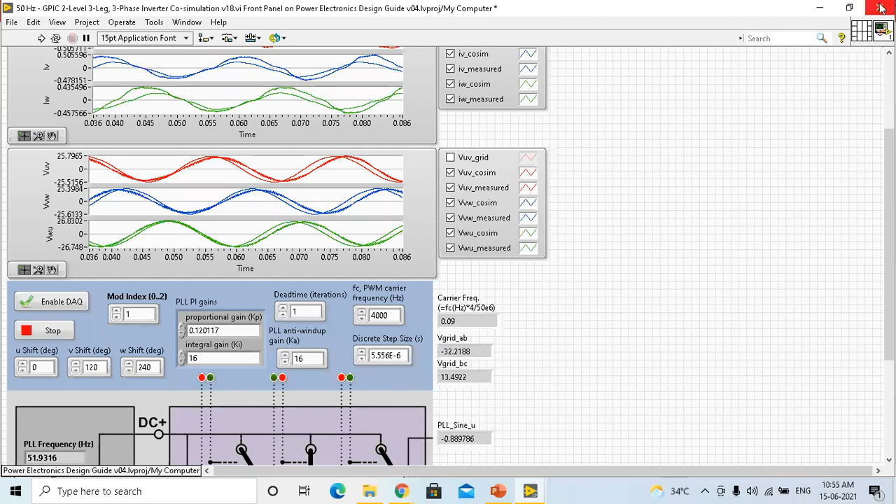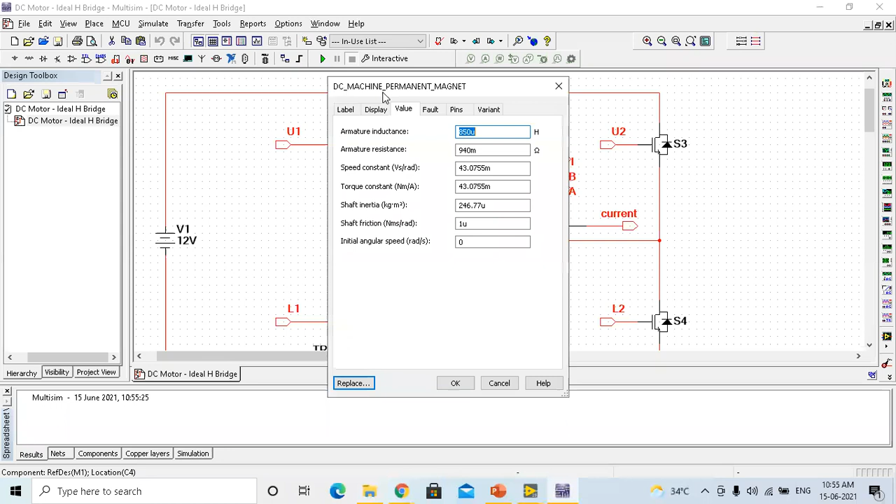So for that, if you see here, we have a three-phase back-to-back inverter with motor control, or a brushed DC motor control. So for that we have a circuit here, which is hosted using Multisim. Using the H-bridge controller, we are able to control the motor, and power supply is also here. And here we are trying to measure the speed of the motor using the incremental encoder. This is the brushed DC machine, permanent magnet, it has its own parameters which can be filled here.

And to give the logic behind it, we have a separate LabVIEW program using which we can generate the signal required to control the motor switching logic. Switching logic before we developed, but there are multiple libraries inside LabVIEW which can help you generate that switch on switch off logic. You can also implement something called dead time, which is basically to prevent the same MOSFETs in the same line from shorting together. So if you develop on your own, you have to take care of all these things, but most of the bridges, most of the logics inside LabVIEW, that is libraries in LabVIEW, will make sure it has all those logics in place.

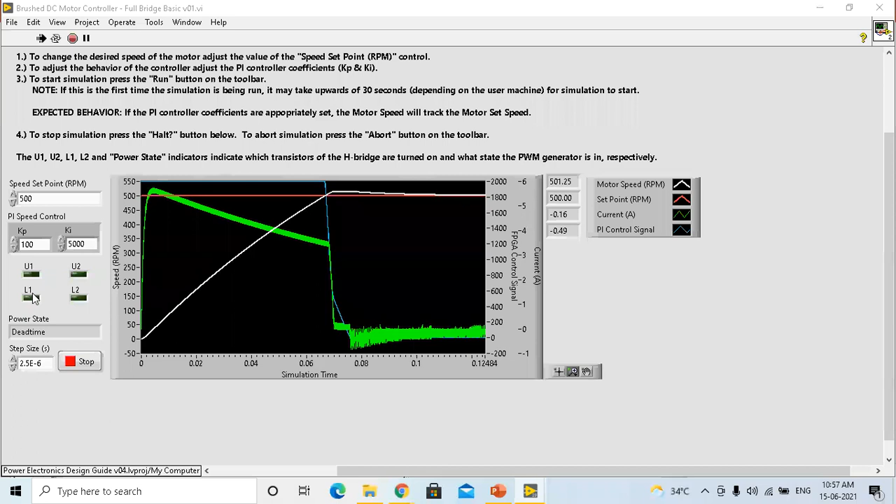Okay, now to control the speed, we'll have a PI controller here. You can have a set point, you can tune the KP, KI, all these things you can do. So this is the motor set point, and this is the current motor speed. It is settling down, that will happen by the combination of motor frequency and stuff. If I change the set point to 100, let's say, this combination of the circuit will make sure that this motor speed will go and settle out there. So on and so forth.

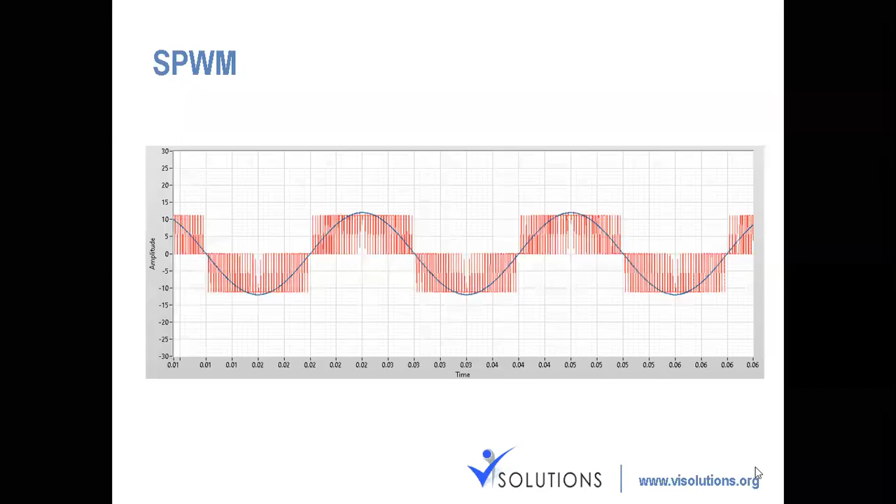So after this, everything we saw is simulation. In future, let's say you want to implement it in the real world, LabVIEW NI portfolio offers several power electronic based hardwares available to generate switching frequencies and other things. You can program an FPGA, NI based FPGA cards, to generate these pulse width waveforms, and directly connect those FPGA hardwares to whatever circuits you are trying to develop. Build that circuit component in Multisim, possibly transfer it to Altium to generate the PCB, and use LabVIEW to control the embedded hardware that is going to control the circuits.

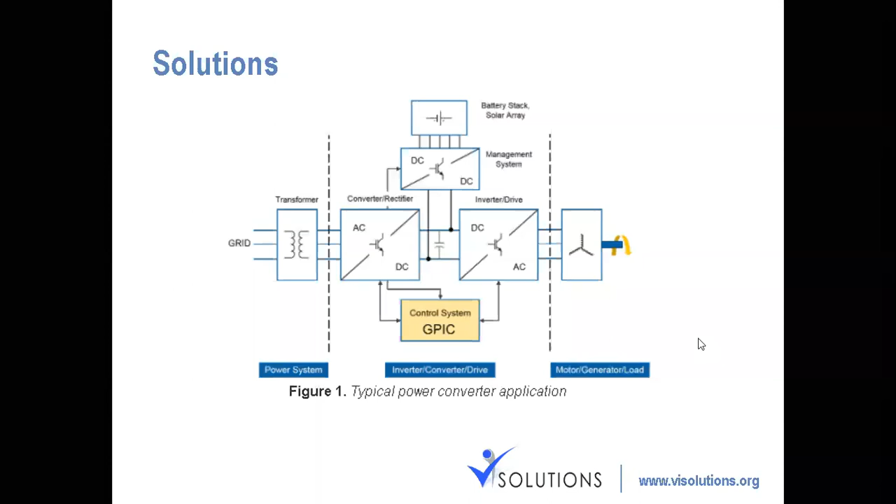So many power applications have been developed using the NI portfolio like this. It could vary from rectifier, inverter, DC to DC converter, DC to AC converter, solar panel, battery stack models, motor generator load, etc. So LabVIEW, the Rio platform, and something called GPIC, this is used for switching, converting the switching level of the inverters.

So this has been done by us. We made use of LabVIEW and an inverter, specifically an SPWM based inverter, where we can generate 60 volts, 50 hertz frequency. The same logic we developed was implemented in the hardware, and this is what was updated.

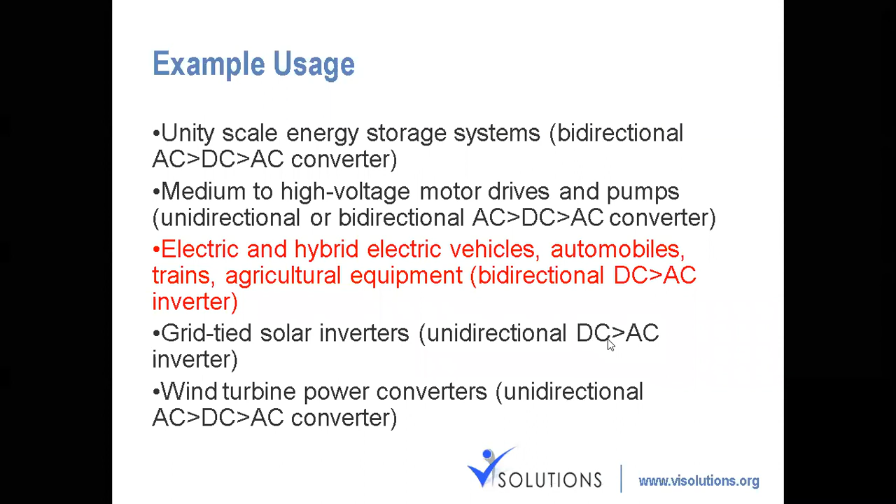There are plenty of physics models available, out of which for our scope we can use it to build, test, and validate the model of electrical vehicle motors and the traction ECUs, etc.

Now some people might ask which companies are actually using LabVIEW, because when we hear about electrical vehicles, people mention MATLAB and other tools, but not LabVIEW at all.

In that case, one of the very famous companies is called Primus Power. They are the creators of Energy Pod, which is used for zinc bromide batteries. So that battery management and battery charging, using them as inverters and other things, is being done using the NI portfolio, that is NI hardware and NI software.

And the total testing and modeling of electrical vehicles, this was hybrid electrical vehicle, using power electronic hardware-in-the-loop simulation by using the NI portfolio. This company is called Hyundai, a Korean automotive company. They produce fully electrical vehicles and hybrid electrical vehicles.

By using FPGA based simulation - right now we use computer based simulation, but FPGA based simulation is also possible by LabVIEW - they were able to develop, test, and model their electrical motor control unit, that is the inverter and stuff, in 1/20th of the time.

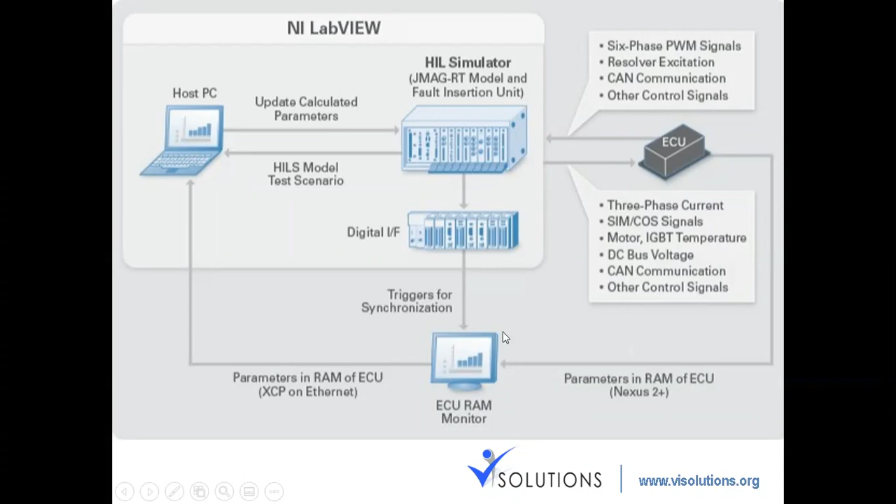So they had several test strategies. By using several NI hardwares and NI portfolio based softwares, they were able to test this by generating 6-phase PWM excitation, other types of communication protocols, measuring the 3-phase current, speed, torque - those things they were able to develop and collect information on. The tests were done in 118 hours instead of when done manually, which took 2,300 hours.

So if you have any questions, I think we had some questions back then, or similar questions if we have, I'll be able to address.

What parameters should be considered for electrical vehicle battery capacity? Battery capacity mostly depends on how far your electrical vehicle is going to go, number one, and how much power the components inside your electrical vehicle consume. The electrical motor draws the most power in order to propel the vehicle forward. In order to control how much current the motor is consuming, and to check the battery discharging and charging curves, proper battery management should be installed. So range is a very important parameter, and battery capacity will be decided based on these factors.